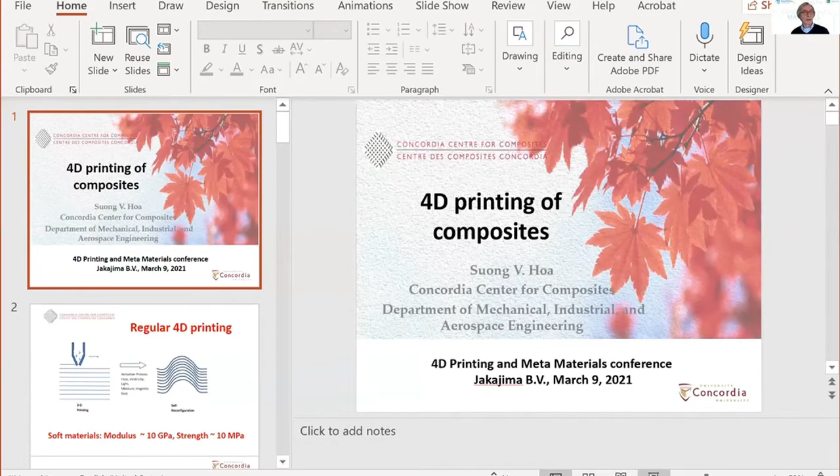Okay, thank you very much. My name is Suong Hoa. I'm a professor in the Department of Mechanical, Industrial, and Aerospace Engineering at Concordia University in Montreal, Canada. I'm also the director of the Concordia Center for Composites. And I've been working in composites for many years.

Mainly these are the carbon epoxy, glass epoxy that have been used in making many components in aircraft, automobiles, or in the wind turbines. And recently I have heard about this 4D and 3D printing. So I thought maybe I can combine the composite material together with the 4D printing to make something new. And so this is the first time that I attend this 4D printing and metamaterial conference organized by Jakajima. So it looks like an interesting conference.

So first, I think I need to define a bit about what we mean by regular 4D printing and also to distinguish that from the 4D printing of composites. So I think that for people that attend this conference, everybody knows about 3D printing. And the picture on the left here shows you the process of 3D printing. That means you just use some kind of orifice with the material inside and you deposit layer by layer. And by controlling the motion of this orifice and also the amount of material, whether you deposit or you don't deposit, then you can make a complex structure. So in this case, you can make a very complex structure, and there is a lot of application for this particular area.

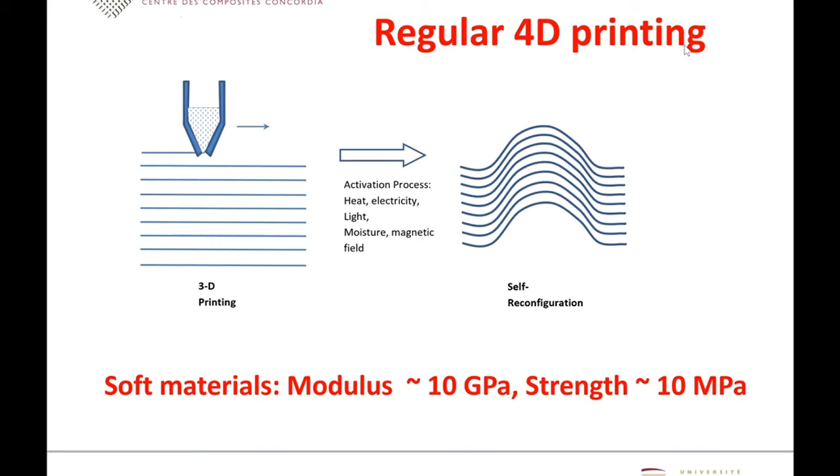And what I feel is that we need to distinguish that from the case of 4D printing of composite. In this case, rather than using the soft material, I think the last speaker talked about the biomaterial, something like the cellulose fibers, and they have some kind of properties. But compared to things that I studied, carbon epoxy, these are the materials that have very high mechanical properties. The modulus is about 155 GPa, the strength is about 1,500 MPa. And so, like I said, these are materials that have been used in making components of aircraft, automobile, or wind turbines. So they are very stiff and strong. So that is one particular difference between the 4D printing of composite and the regular 4D printing.

The second difference is that we use an automated fiber placement machine, which is a fairly large machine compared to the 3D printer. Normally the 3D printer is fairly small. It can fit onto a desktop, and it can make some kind of small components. But the automated fiber placement machine is a fairly large machine. It can be used to deposit layers additively to produce a stack of composite layers. And these layers consist not only of the resin, but also the fibers. These are continuous fibers. So that's the second kind of difference between the 4D printing of composite and the regular 4D printing.

The third difference is that rather than having the different materials at different positions along the stack of the deposition, we depend upon the anisotropic properties. That means the change of the different properties along different directions of the materials gives rise to the interaction between the layers, and that kind of anisotropic property gives rise to the change in the shape of the material. So by using these kinds of things, we would be able to make structures of complex geometry with good mechanical properties using only flat molds.

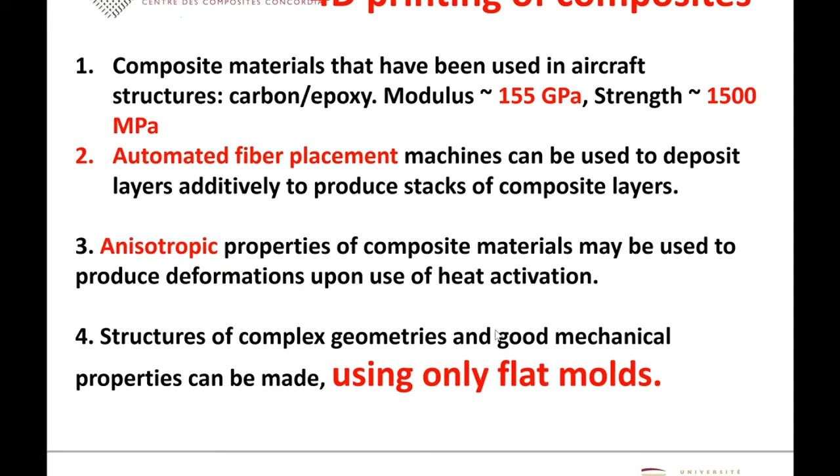So, saying a little bit about the anisotropic behavior. Anisotropic behavior means the properties depend on the direction. For example, take a look at one single layer of the composite, such as the case of the carbon epoxy here. Then you can see the blue lines, they represent the fiber. These fibers are fairly small. Normally the diameter of a fiber is about 10 micron. Now the diameter of a hair that we have is about 100 micron. So that means the diameter of this fiber is about 1/10 that of a hair.

So when people make the composite, they use a lot of these fibers. They have very tiny fibers, and around each of these fibers you have some kind of epoxy resin. The epoxy resin can surround the surface, and it is used to bond many of these fibers together. So in this case, you can see the material consists of fiber and resin, and the anisotropic property is that it varies along the fiber direction and transverse to the fiber direction. If you look along the fiber direction, normally it's very strong and stiff. Transverse to the fiber direction, it may not be.

But one particular aspect that we are looking for in the case of 4D printing here is the shrinkage. That means that when you heat or cool this material, along the fiber direction it doesn't expand or contract as much, because it's controlled by a lot of these stiff fibers. But transverse to the fiber direction, it expands and contracts a lot. The expansion and contraction may be 100 times bigger along the transverse direction than along the fiber direction. So that is the anisotropic behavior of the layer.

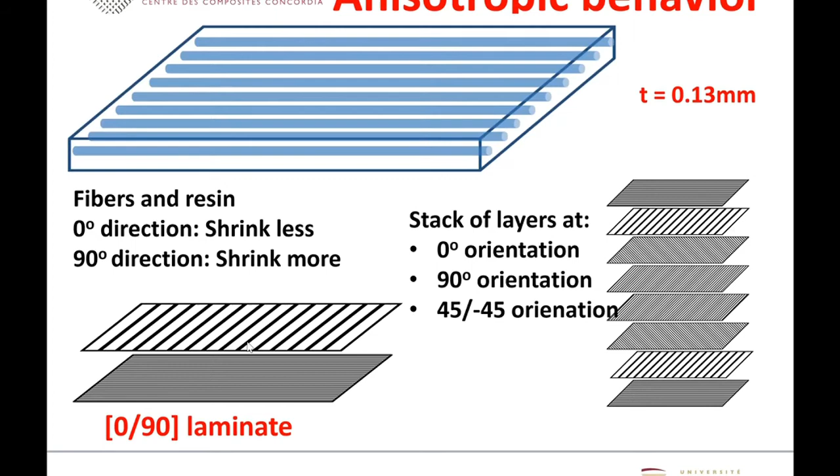So basically that is 4D, the fourth dimension. The fourth dimension is that after you start with a flat layer, then you cool it down, and that gives you the curved configuration. So that's basically the idea behind the mechanism of 4D printing of composites. It depends on the anisotropy, the difference in properties along different directions, to create the change in shape of the structure. And at the beginning, you only need a flat mold - you lay everything down flat to begin with.

So next, just to give you an idea of what an automatic fiber placement machine is - here's a machine. It has a lot of complex parts, but basically it lays down some kind of tape of thermoplastic. You can see it laying that down on a flat mandrel here. Right now we have the fiber along the 0 degree orientation, and what I'll show you is the machine laying down fiber at 45 degree orientation.

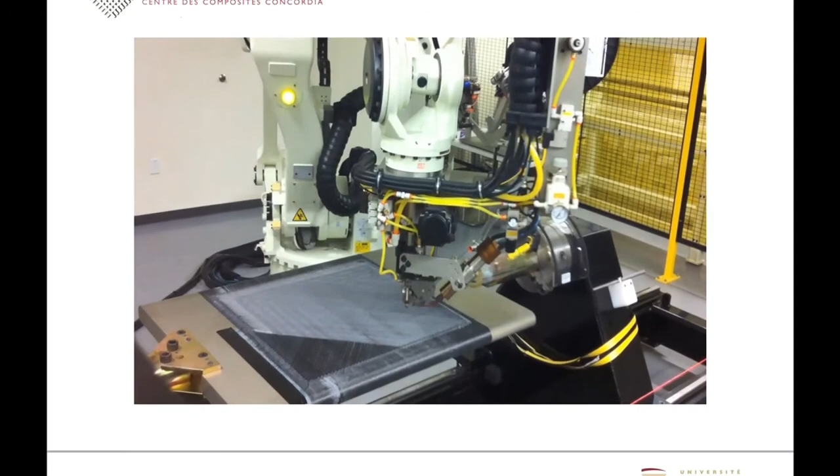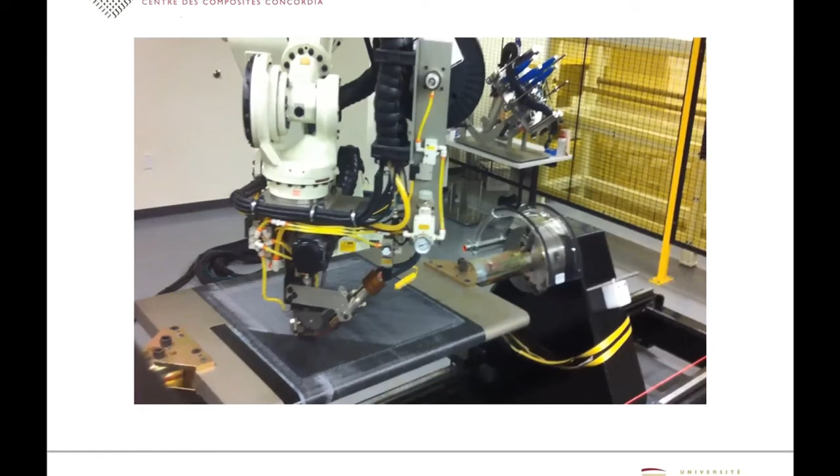Okay, so that's basically the operation of the fiber placement machine. By controlling the machine, you can lay down the fiber at different orientations. In this presentation today, we only look at the case where you have 0 and 90 degree orientation of the fiber. So I want to show you a few applications we've developed over the last few years.

We have made what we call the S piece - pieces that have the shape of an S. We also made composite flowers, the case where you have many petals that look like a flower. Then composite leaf springs, which have good practical application because of good stiffness and strength. And also omega stiffeners, which we use in aircraft.

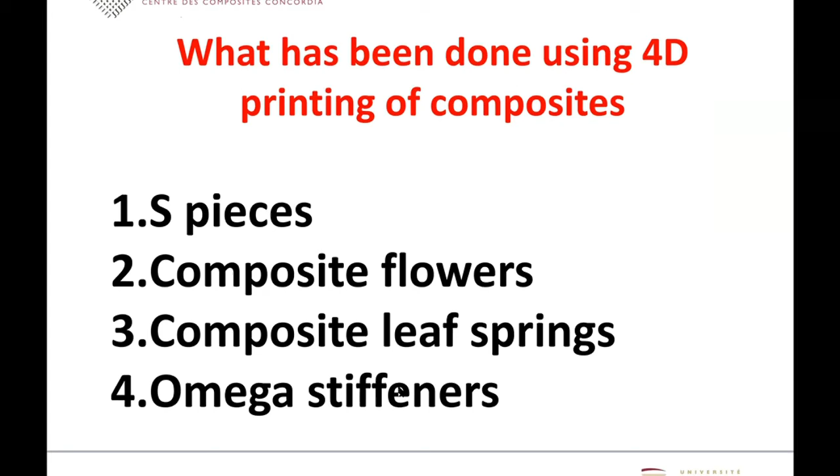So in the case of the S-shaped piece, what we do is have two levels, level 1 and level 2. At level 1, on the right-hand side we lay down one layer at 0 degree orientation, and on the left-hand side we lay down a layer at 90 degree orientation. At level 2, on the right-hand side we have a layer at 90 degree orientation, and on the left-hand side we have a layer at 0 degree orientation.

So by doing it like this, on the left-hand side you have a laminate with 0 degree on top and 90 degree on the bottom. On the right-hand side, you have the layer at 0 degree on the bottom and 90 degree at the top. So these are opposite to each other. By the time you cool it down, due to the fact that these different layers have different shrinkage, this piece will curve like this.

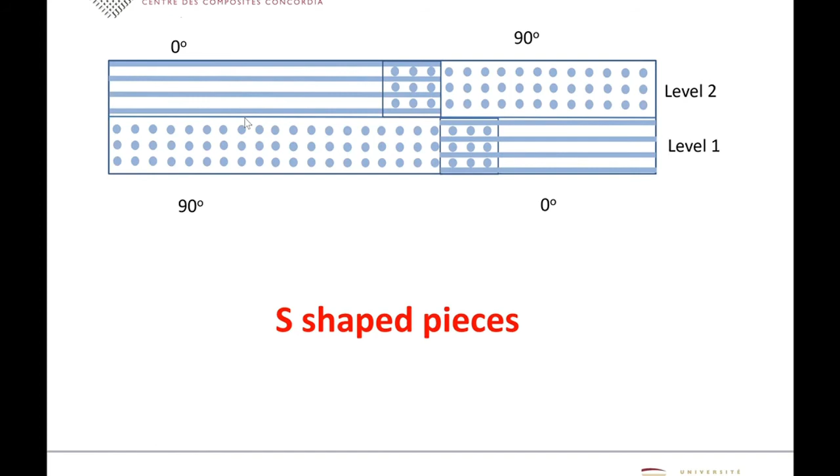It will curve down, concave down, where this piece will curve up. So then basically you have a shape like an S. So that's what we have. That means at the beginning, when you lay down, things are flat. And by the time you finish making it, you can have the different kinds of pieces with the S shape. And depending on the overlap here, you can have different shapes if you wish.

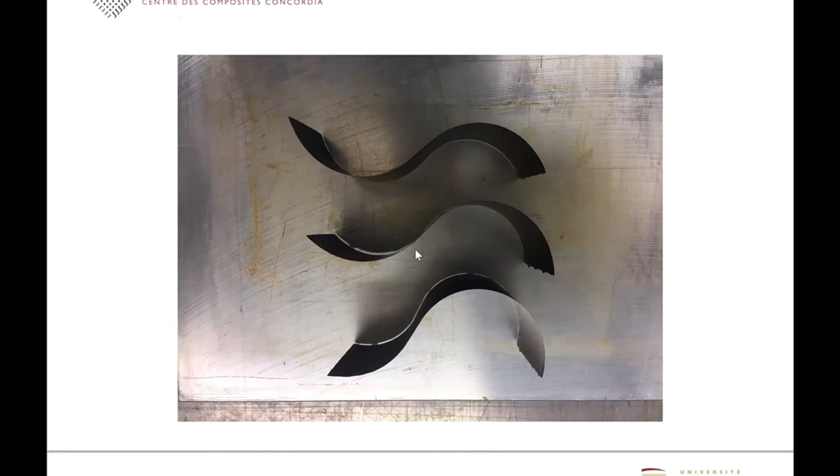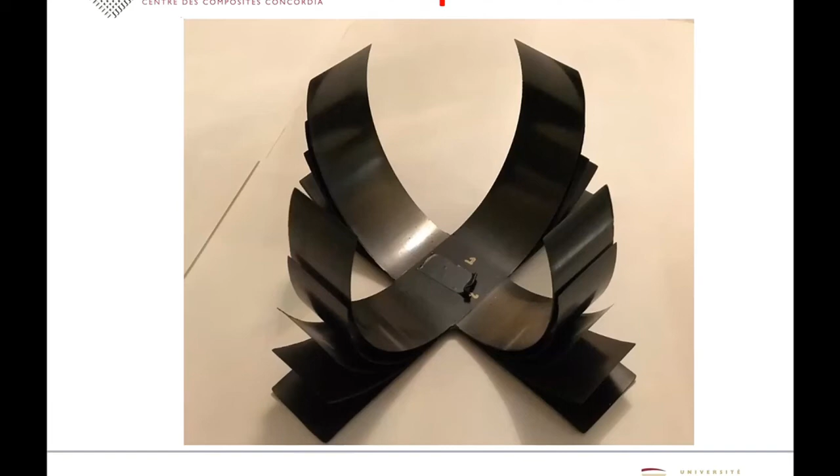Then we have another application, because when I show this presentation to people, they say, okay, that's impressive, but it looks like not very strong. You have maybe something like a shape, but you don't have the mechanical properties. So in this case, we were trying to see whether we can develop something that is stiff and strong and has some kind of good engineering applications. So we developed what we call the composite leaf spring.

Normally the leaf spring is the one that people use to support the automobile. Underneath the car, you have the leaf spring that is supporting the weight of the vehicle and the vibration and things like that. Normally these are made of steel, some kind of metal. People have also made composite springs using composite as well, except that they have to make a mold. That means they have to make a mold of this kind of shape, lay the composite on top until they finish, and finally they have the piece. So that's okay. You can make the composite leaf spring using a mold.

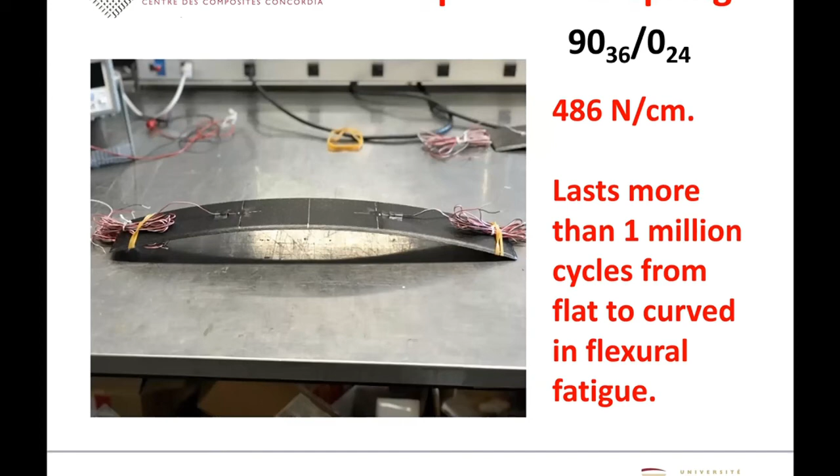We exaggerate the kind of displacement, but remember, each layer here is only like a sheet of paper, 0.1 or 0.3 millimeter, the thickness of a sheet of paper. For example, 0.3 means three layers, so the thickness of this is about three sheets of paper. So it's very thin, and the way we show it like this is to really show what is happening at the micro level, but in reality, it's basically flat.

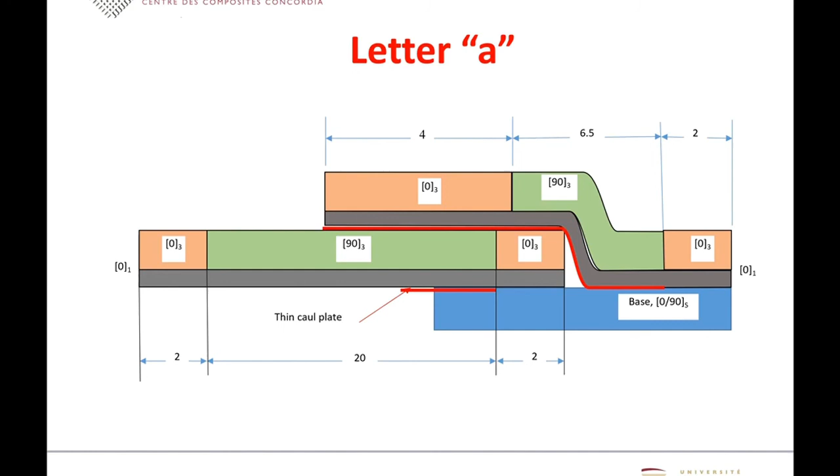And this is what happened at the end. After you finish, it gives you this kind of shape. It looks like the shape of an A.

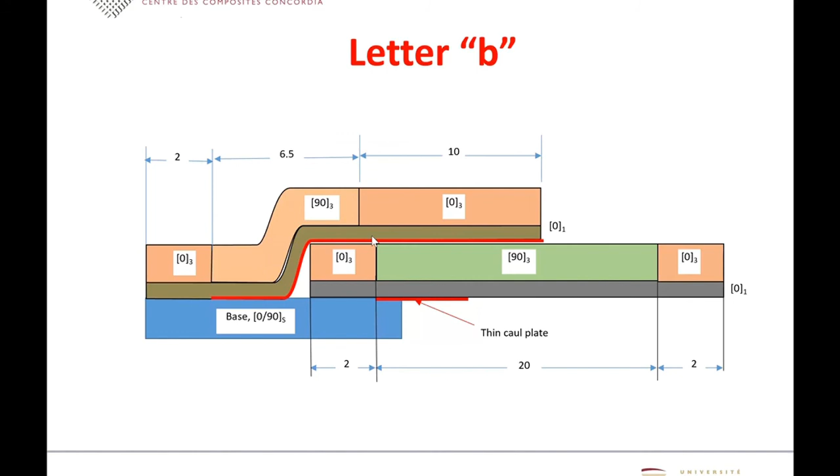And again, you do another one here for the letter B, the same thing in terms of rearranging the different 0-90-3 orientations, and you have the letter B. And then also finally the letter C, again with different layers, 0-90, whatever, and you have the letter C.

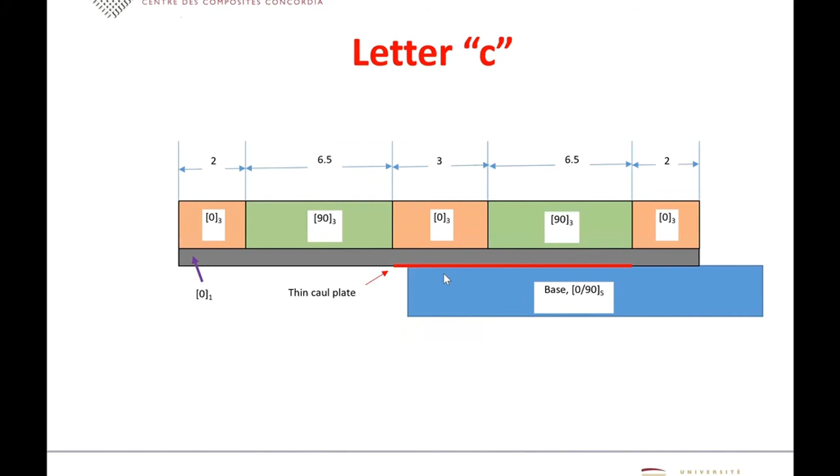So the reason why we do this is to show that the technique can be used to make a very complex structure.

And then also recently we developed what we call the omega stiffeners for aircraft structure. Normally in aircraft structure you have many of these so-called stiffeners, used to stiffen many of the stringers or different components inside the airframe. The stiffener can have the shape of L shape, C shape, Z shape, T shape, and so on, and also one we call the hat or the omega stiffener. This hat omega stiffener has a base, and also has something like a hat.

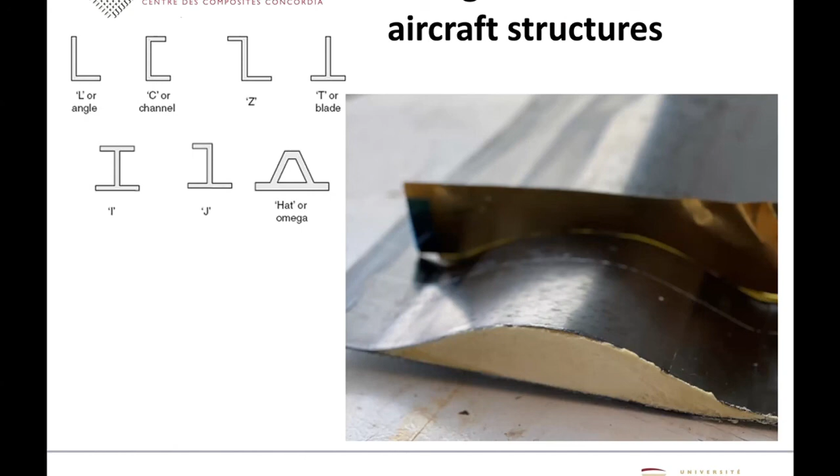Now, for other potential applications, you can use this technique for efficient packaging for transportation. If you were to transport something bulky, a large volume, into some remote location, such as outer space or the North Pole, it would be difficult or expensive to transport something in large volume. But if you use this technique, you can make a flat structure, and it would be more efficient to transport than a bulky volume.

By the time you arrive at the location, you can cool it down, and the thing springs up to the shape you want. So that is another kind of application. Or you could have a flexible core for morphing aircraft structure, aircraft wing, where you can change the configuration of the structure. Or you can have flexible, extensible antennas and solar cell tractable mechanisms. These are the items we're working on right now.

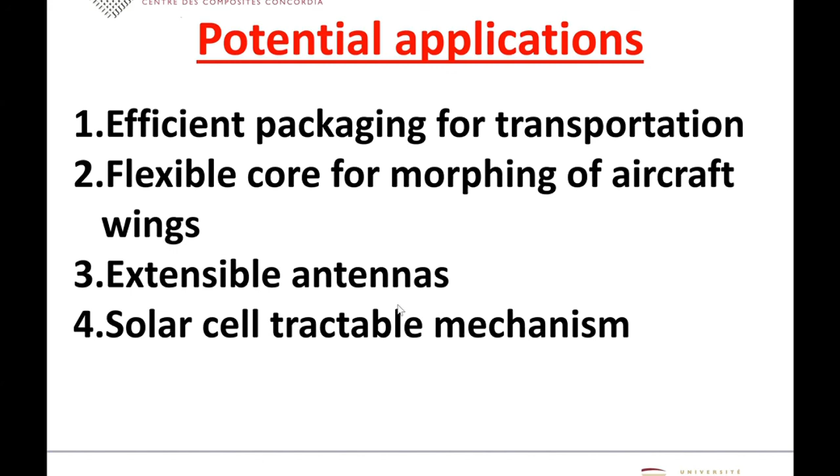So in conclusion, I would like to say that by using anisotropic properties of composite, one can make engineering structures that can be reconfigured to a desirable shape after the deposition using additive manufacturing. And as such, you can make complex structures without using complex molds.